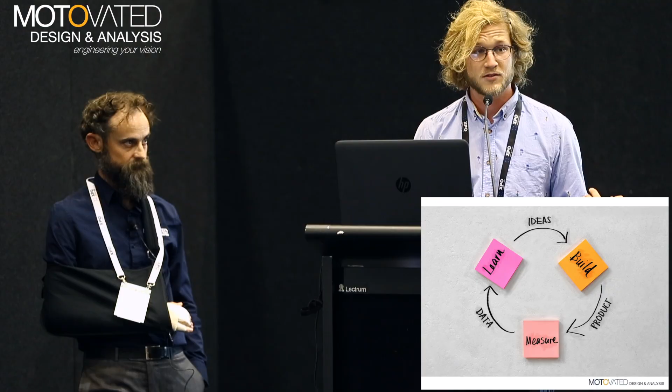From the technical point of view, it's really easy to understand. You just have an idea or a concept, go prototype it and test it. Easy to catch. Now, for the commercial point of view, you can realize that it is happening all the time with startups.

They have to figure out their business strategy, and they will use something called the business model canvas, which is basically a diagram. Well, you all know probably. A diagram really easy to see what's going on, coming in, coming out from the business. And according to the theory, you have to update that business model every day. So that's just, again, doing that loop.

And now when you talk about the users, what they feel, you're talking about the emotional part of the product and the business. That gets a little bit more abstract. But you should take care of it still. And this is the best way of doing it. Because really, at the beginning, you have to nail down what are your requirements and what you're going to do with your product. And I'm going to expand this a little bit more, because that's, as I said, a bit abstract. It can change for different types of products or services.

Okay, so something that we should remember is that we don't sell products to people. We provide to people the ability of becoming a more awesome person by using our product and basically buying it. That's what you have to remember. So the guys from Cheerios know that properly. And this is the best example of what I just mentioned.

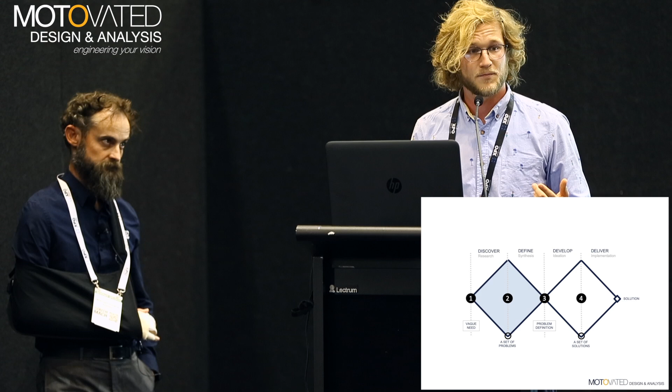So, coming up with a lot of potential problems to solve, but you really wanna focus on one. Because the design team, the technical team and the commercial team need a fully defined problem statement, and from there, you can start designing. I'm not saying that the first part is not designing, but it's a bit different. And there are several processes and tools to go through this journey, because it's really a learning journey, difficult.

And, well, you can look at the design thinking tools and some other bits that you can use, but mainly it's divided into observation. Just go to the market, see what's going on, and figure out what those needs are, and a bit of analysis too. Something that those guys from Cheerios did really well is analyzing. So not only looking at the market, but realizing what's inside that customer or user. And that's tricky because sometimes you are dealing with needs that not even the customer knows, and those are called latent needs.

Just a wee example of that, this is from McDonald's 10 years ago. They were experiencing a real decrease in sales of their milkshakes, and they wanted to increase them and figure out what was going on. They made a huge error, and they put so much effort and money into making a nice flavor thick shake, chemistry guys behind that, a lot of money and resources. And it wasn't until they asked people why they were buying this and who was buying it that they realized most people buying it were mainly commuters.

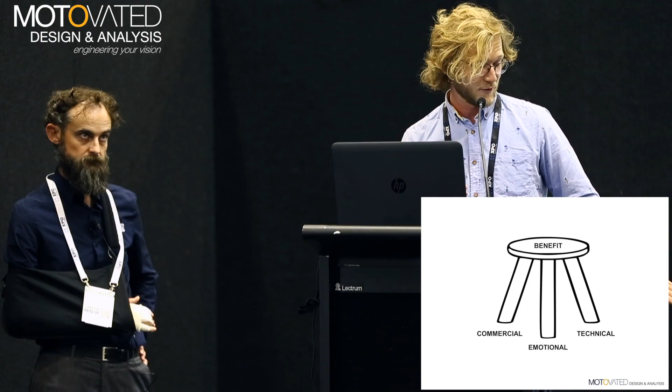And some people got really good at that. But I have to say that some people got so much funding that even with that funding, they couldn't manage to deliver a good product in the technical framework. So as I said, this is a three-legged stool. You can focus on one, but you really have to take care of all of them.

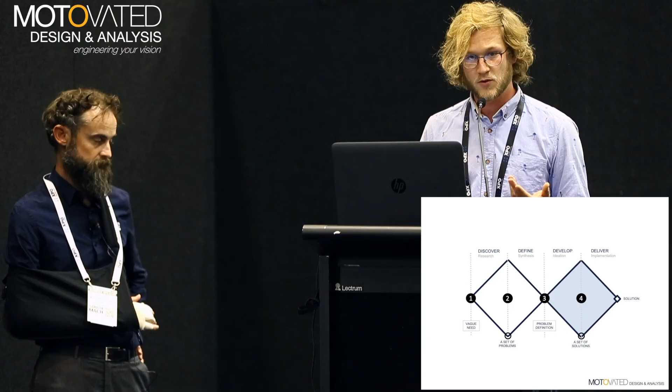So yeah, this kind of MVP, minimum viable product, is a good way to figure out that problem statement that you will put into your design team and keep going. So you are able to go into this development. That's another journey. I love it, actually.

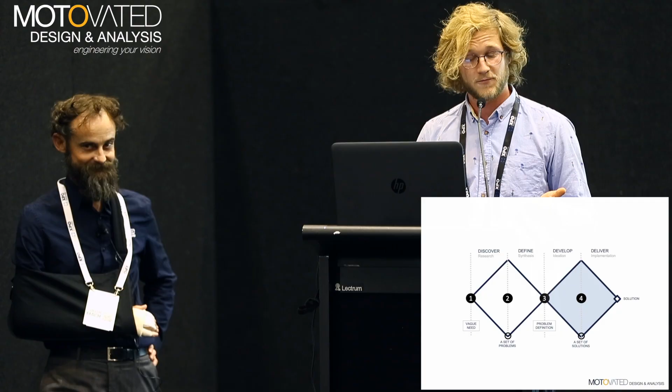And yeah, you have your problem totally defined, and then you're going to find so many solutions. Some of them are going to be good, some of them are not going to be good. And you really have to find your path into that solution that merges into a nice product, delivering benefit within a framework of time frame and cost.

So again, talking about minimum viable products, something that is really useful to do is represented in this image. This is called Evolutionary Design. As I mentioned, a minimum viable product is the smallest or most simple thing that you can make, and you can learn from that into adding value to your product. So the first image really represents shape and dimensions of a guitar that you want to design. You don't need to drill holes, you don't need 6 strings, you just want to validate something.

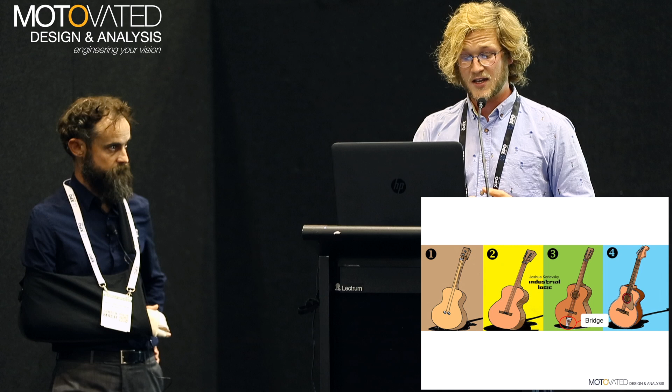Then, once you know that, you can really think about putting nice features like the tensioning system for the strings, represented in the second image. And you can have many ideas. And if you want to find a nice way to do it fast, you don't really have to reinvent the wheel many times. The third image represents that you go to the music shop, buy a new guitar, and just change that bridge that is your new design or your new feature to your product, and just see what's going on.

And then in the ideal world, you will validate all those bits and pieces, you will put them together, and it will work. Well, sometimes that doesn't happen because there are some interactions that your technical team didn't think about. And Daniel is going to talk a little bit about that, because there's a principle that, if you follow it through your design process, will help you nail down that joint architecture with a lot of features that work on their own, and will work when assembled. And that's really similar to the KISS principle, so just keep it simple. Please, Daniel, tell us a little bit more about that.

Sure. Thanks, Carlos. That's really awesome. So what Carlos is talking about, we more formally call axiomatic design. It's just a couple of principles that say if you have multiple functions in a product, keep those functions separate. Don't try and get one thing doing two things at once, or one thing. That would be even worse. And keep everything as simple as possible. Don't have massive tolerance stack-ups. Just keep it really simple.

So an interesting product I've been working on at Motovated for the last year or so is a better mousetrap, literally. And this guy here is really fascinating. If you want to talk about this with me more after this, I'm quite happy to, because I now fully understand how this guy works, why it does, and why it's actually very difficult to scale it up.

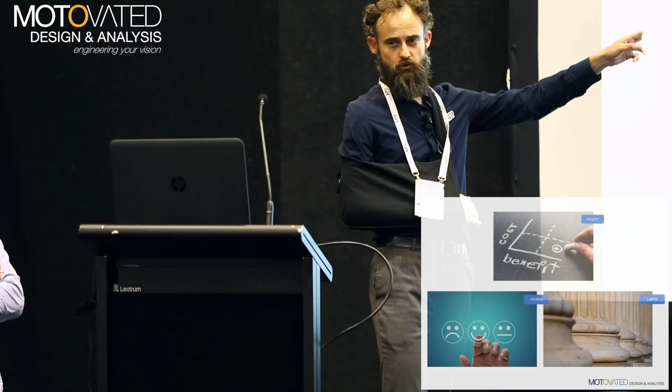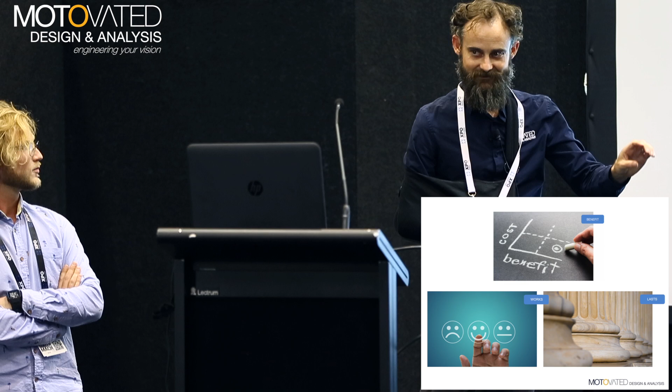I think that's axiomatic design in a bit of a nutshell. Now, I guess we kind of talked about the benefit of a product and how you can make it work. There's a really important aspect that it does work. I remember when I was at F&P, we have heaps of A3s or discussion documents that explain what specifications it should meet, what it should do in this situation and that situation, but never once did it ever say that the product should actually work. So, it should meet this requirement and that requirement, but at the end of the day, the product has to work. It doesn't do anyone any good if you turn it on and nothing happens. And that it does so over time, that it lasts.

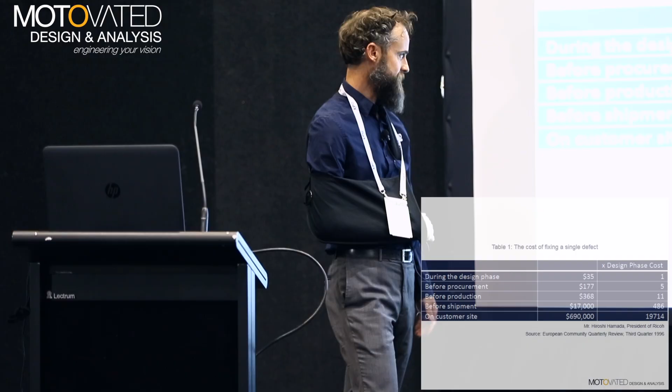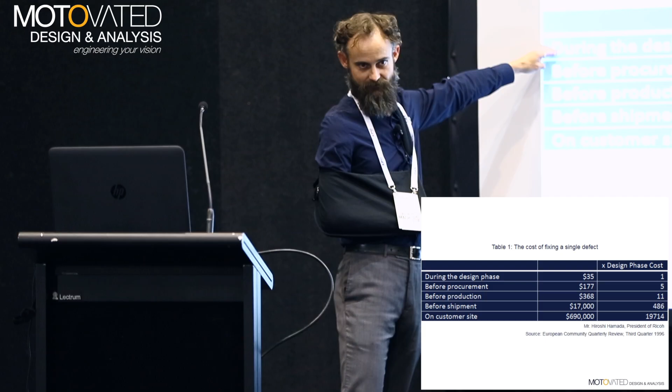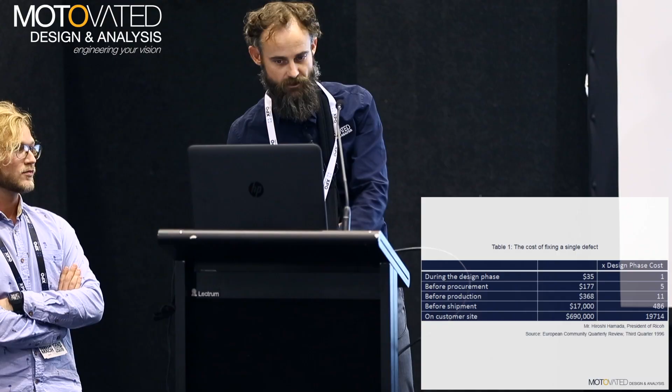Now, I guess one of the main things is in continuous testing through that cycle, what we're doing is we're trying to capture potential failures before they get to the customer. And in addressing that commercial side of things, here's an interesting little data set from Ricoh. It's quite old, but it's actually still relevant. If you capture a design problem or even a product problem in the design phase, you can obviously address it right then and there. But the further on you go through your product life cycle, and especially if it gets to the customer, you are in big trouble financially. You actually want to do as much as you can here while achieving that time to market. It's a challenge, but that's the kind of challenges we like. So you can just see that those costs really ramp up, and essentially the last line is your warranties really coming into play there. You don't want to get those recalls.

Now, in terms of your product resilience, most people want this for their product. They really want it to be strong and robust and actually support a lot more problems than it might expect in the field. I don't know if anyone's heard of planned obsolescence. It's something you hear about. I've actually never seen it in my whole life. I've worked for companies and they try so hard to make their products last. And if they can last a bit longer, another year, that's amazing. And they could even put a bit more warranty on it, and that will look really good from the business point of view. So, how can you achieve this?

Well, you've got to really just start testing as soon as possible. So if you've got something you can hold, you really are at that opportunity for testing straight away. You're doing your market testing, your commercial testing, and you're actually doing physical testing. If you make something out of flimsy FDM, that printed plastic from a MakerBot or whatever, and you drop it on the ground, actually do look at it. Don't be dismissive like, oh yeah, well that was pretty weak to begin with. Actually, just take notice of how it broke, because it's actually a failure mode that is important for the product on that product's journey.

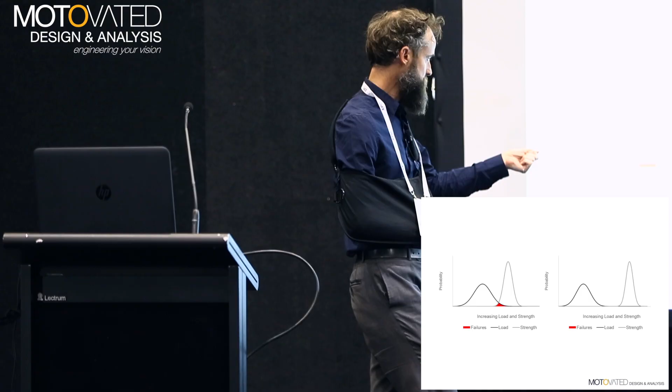I guess I'm an engineer. I'm quite fascinated by the technical side of things. I'm just going to give you a little bit of a highlight as to what physical testing actually can bring to a product. Now, in the simplest sense, a product is going to have a strength. You say it's got to be this strong and it's going to be subject to this kind of load here. Maybe you've got a pen and you break the pen. You're going to expect it's going to break at so much of a load. Probably don't break it.

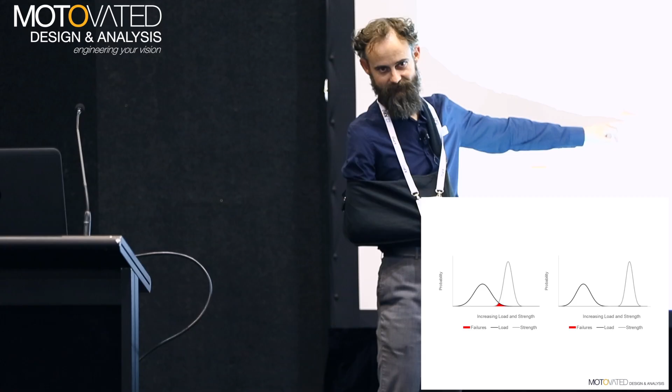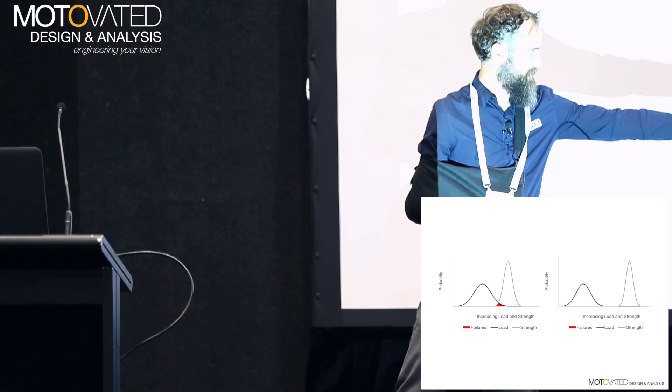But in fact, it's actually statistical. Nothing's perfect. Everything's got tolerances, your materials and everything has that. So what actually happens is your loads can be higher or lower than expected. The strength of your part can be higher or lower than expected. And sooner or later, it can break because they're going to overlap and you're going to exceed those values. Now, when you have your FDM part that you've just dropped on the ground and broken, have a look. See how you might be able to make that stronger. What you want to do is increase that gap between your strength and your potential loads. So you're creating a confidence in your margin.

Increasing confidence in your product performance by increasing that margin. Now, if you actually subject your product to all sorts of stresses, you give it to your manager or something to play with, they'll probably surely break it, or to some users, just keep a track of all the different ways they break it and just keep implementing fixes until you kind of say, well, we can't actually afford to fix that anymore. That's never going to happen. You actually have to decide and agree that that's going to be the case.

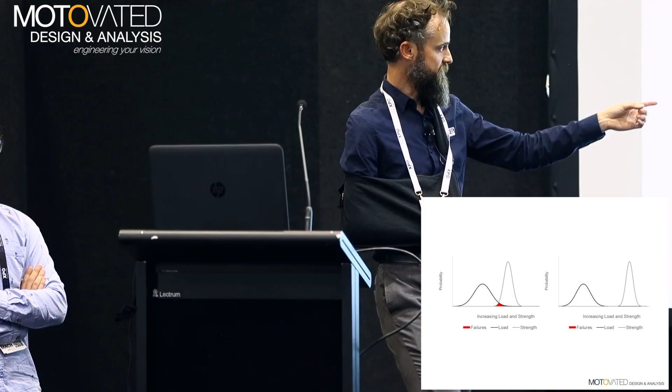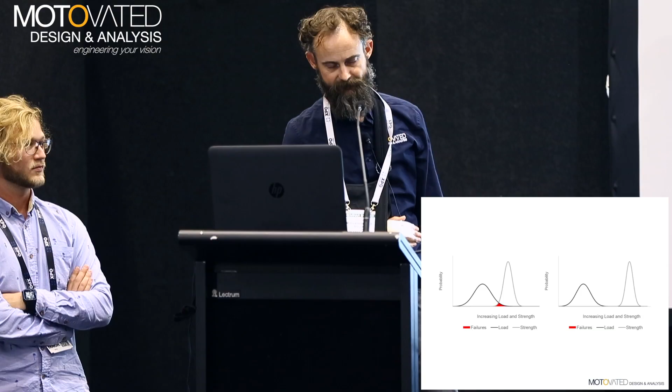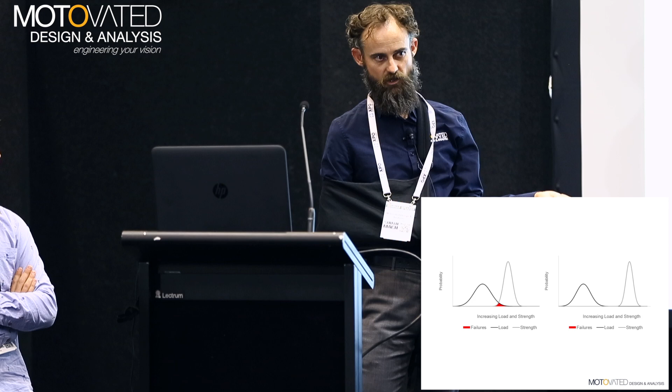Now, that's actually, in a nutshell, what highly accelerated life testing is, or HALT testing. You actually want to purposely expose your product to very extreme stresses. You want to build this margin out so big that there's really, really little opportunity in the field for it actually to fail. In fact, you can actually make that margin so big that when you make your product, at the end of the line, you can actually stress the heck out of it so that you're minimising out-of-the-box failures. And you know that you've got so much margin that you're not actually reducing the life of the product. I think that's good value.

So you can be starting all of this conceptually right from the very first chance you've got it in your hand. You can even look at simulation to get some really quick, broad brushstrokes of how the product might respond before you even build it, and just take it from there. Yeah.